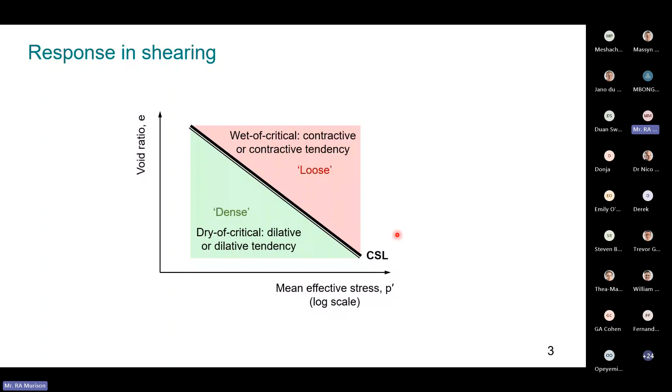Now, how does the state of the soil influence response in shear? I'll start off by looking at an example of a sandy soil, sheared drained in triaxial compression.

This is probably the reason that if you look at your typical drained limit equilibrium analysis, void ratio doesn't really feature if you're designing on critical state friction angles, and you're happy to assume one friction angle for the soil, because the friction that can be mobilized during drained shear is the same for both cases at critical state.

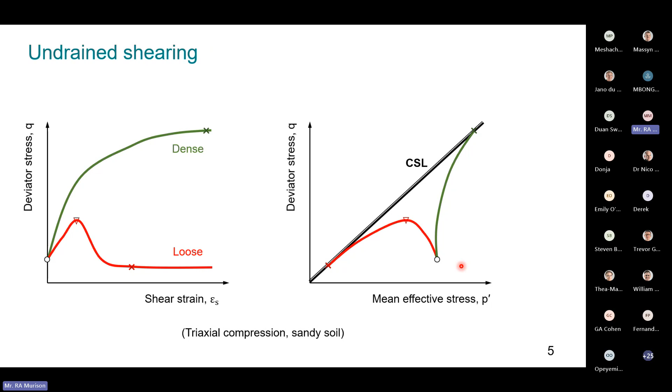Where the real difference comes in is during undrained shearing. Again, we've got two samples starting off at the same stress state. The dense sample might show a tendency for volume decrease, so generation of positive excess pore pressures initially, after which it will exhibit dilative tendency to critical state. We mobilize a much higher undrained shear strength for the dense case than for the loose case, where contractive tendency is exhibited from the beginning of shearing. We mobilize some peak undrained shear strength, and then there's strong strain softening to critical state. Sometimes this critical state undrained shear strength can even be lower than the in situ value based on anisotropic consolidation that might occur in situ.

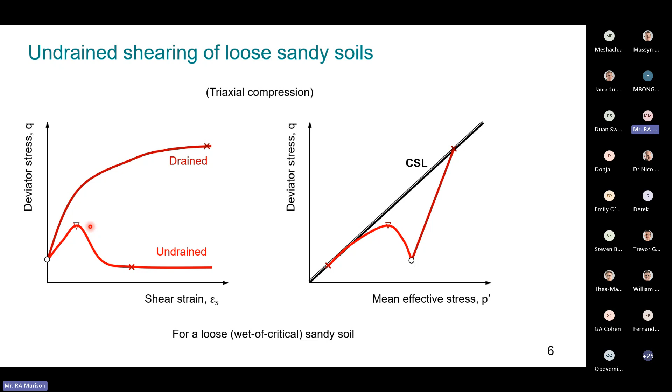So just a summary on that, and why we're particularly concerned about undrained shearing in this day and age: if we have the same sample, loose, starting at the same stress state, one sheared drained and one sheared undrained, we can mobilize a much higher shear strength in the drained case than the undrained case at both peak and critical state conditions. So where does compression behavior come into all of this?

Critical state soil mechanics is a concept that marries the compression or consolidation and shear behavior of a soil. We've seen now how the state and stress history of a soil element can significantly influence its response during shearing. How does the element get to that current state?

If you look at a tailings-related example where you deposit an element of soil onto a facility, it's a geologically new material with no stress history, so we know its current state. If we do not at the very least have an opinion on the compression model to which the soil conforms, how would we know what its future state might be, and as a result, its future response in shearing?

I think it's quite curious that we can calibrate entire critical state soil mechanics based constitutive numerical models using only the shear behavior, without ever considering compression behavior, when critical state soil mechanics at its core is a framework that combines compression and shear behavior. So that's just an opinion, I suppose.

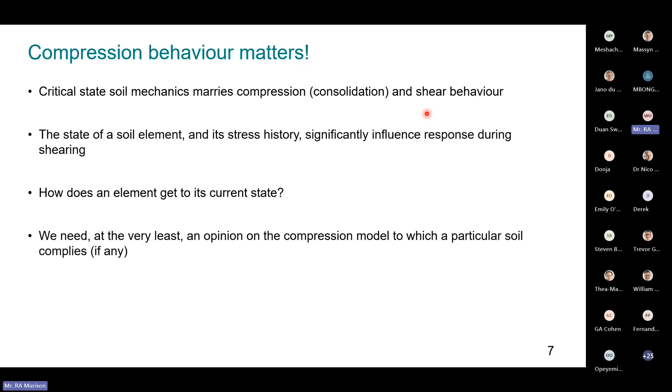But if we move on to our idealized frameworks for compression behavior within the realm of critical state soil mechanics, I'd like to start off by explicitly defining what I mean by normally consolidated throughout this presentation. An element of soil, if it is currently at its highest effective stress throughout its stress history, is considered normally consolidated. That means a soil element is over-consolidated if and only if it has experienced greater effective stress in its history than its current effective stress. This is the strict definition which I'll stick to throughout the presentation.

Now we'll start off with an idealized framework for clays. Terzaghi, in his original theory of one-dimensional consolidation, assumed that for any given soil, a unique relationship exists between its void ratio and effective stress if it's normally consolidated. So what that implies is a unique normal consolidation line. But Terzaghi never actually experimentally proved this explicitly.

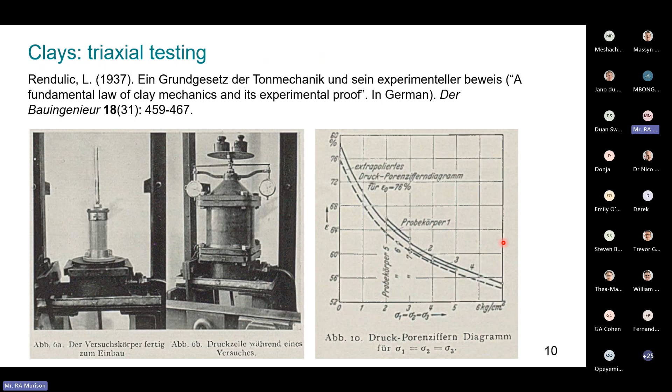This is a screenshot from this 1937 paper looking at some of the triaxial consolidation results. If we trace over these and plot them on a log scale, like we typically do these days, these are the results. We're looking at 4 different samples prepared to different initial void ratios, then consolidated to various effective stresses with the volume change tracked.

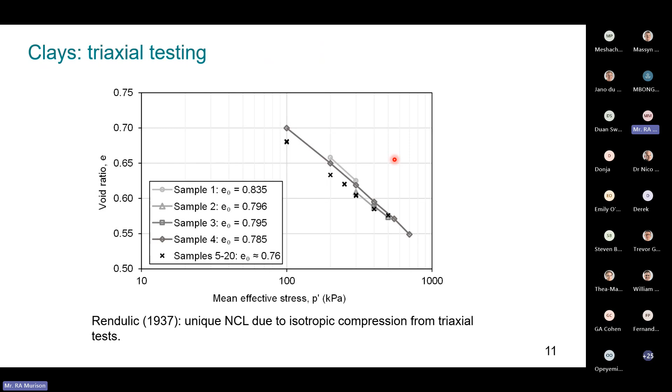These seem to plot within a very narrow band. Additionally, he prepared 16 more samples, which he consolidated to their effective stress at the beginning of shearing in one step, and those are the X's we have here. There's actually 16 X's plotted here, but they're really plotting on top of each other. What we see is that all of these results converged into a narrow band, and this was enough evidence for Rendulic to propose that a unique normal consolidation line exists for a given remolded clay.

So if we put this all together, we get our idealized compression model for clays within the realm of critical state soil mechanics. What we have is a unique normal consolidation line, which acts as a state boundary surface. This separates impossible states from possible states for remolded states of structure, which will become important later. Plastic strains can only be generated upon this normal consolidation line. Then we've got an infinite number of parallel swelling lines upon which strains are elastic, and the initial void ratio of a sample does not influence the position of this normal consolidation line.

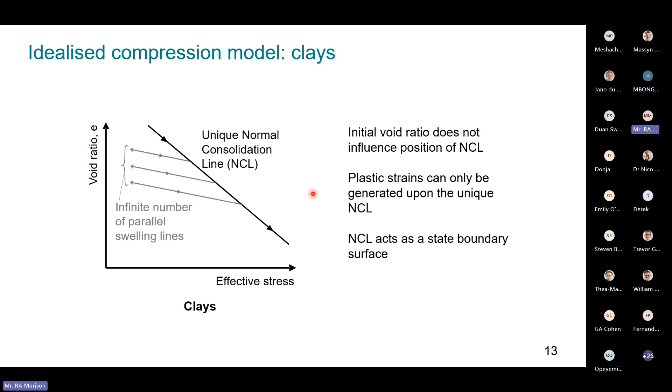And this is applicable to high stresses. If we look at any of the experimental results from other authors that they presented to verify their constitutive model, convergence onto the LCC only occurs at very high stresses, often over 10 megapascals. One limitation, though, is that they assumed the compression behavior at low stresses is elastic, and that seems counterintuitive. If you have a loose packing of sand, you load it and allow the particles to rearrange themselves, then remove the load, it's unlikely it would rebound back to the same initial volume.

So along come Jefferies and Been in 2000, presenting what is probably the most complete experimental program proving the compression behavior of sands that we have access to. They tested an Erksak sand, which is a clean sand with a D50 of 330 microns and a fines content of 0.7%. Importantly, all the tests they considered were normally consolidated from the outset.

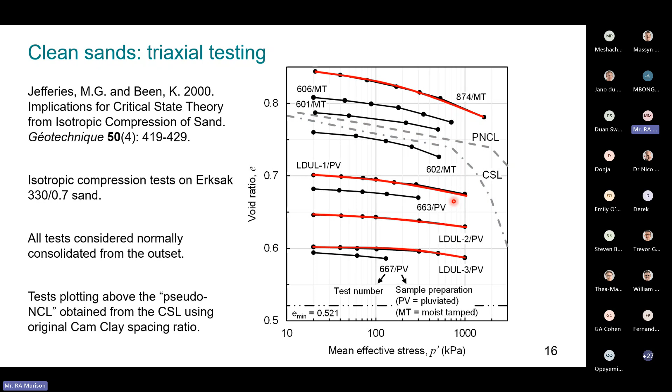Then I'd like to zoom into these 4 tests that I've highlighted in red. Each of these tests was loaded and unloaded, sometimes a number of times. What we see for each of them is this classical form of a normal consolidation line and a swelling line, which is flatter than the normal consolidation line, meaning that since we don't recover all of the strains imposed during consolidation, plastic strains must have occurred.

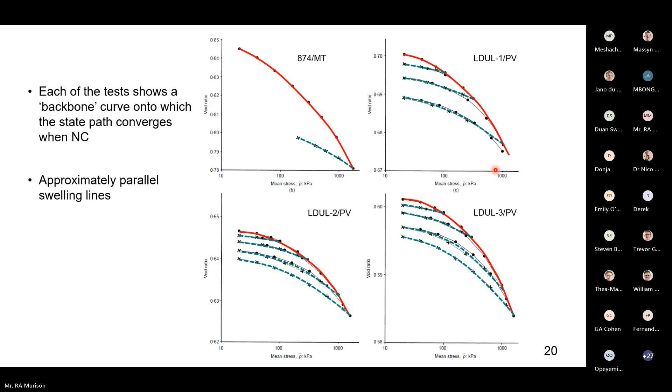So we see elastoplastic behavior here rather than strictly elastic behavior. If we call this a normal consolidation line and then the green line a swelling line, we see the same form for all of the tests where we've got this backbone normal consolidation line and a number of parallel swelling lines.

If we put all of this together, we get our idealized compression model for sands, which has an infinite number of parallel normal consolidation lines, upon any of these, there can be plastic strains that are generated. None of them act as a state boundary surface until they converge onto the limiting compression curve, which here is considered to be the state boundary surface.

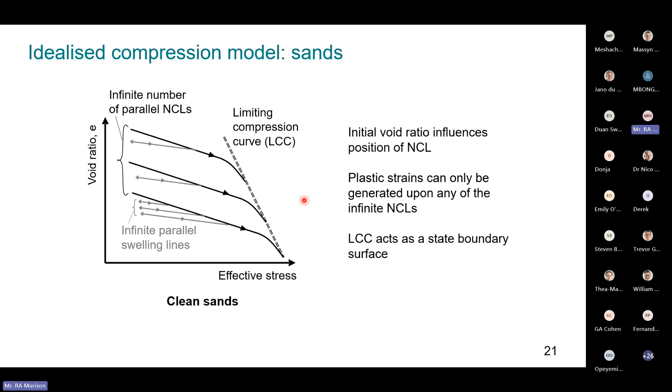The initial void ratio does influence the position of the normal consolidation line. And then again, we have an infinite number of parallel swelling lines, as we did with clay. So yes, just a summary with the 2 idealized models next to each other.

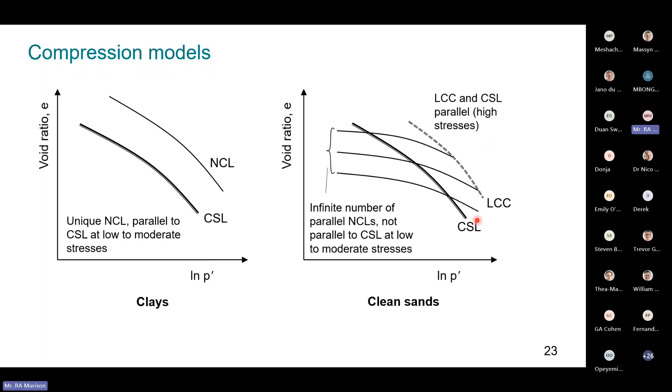The reason that's important is for clay, if it is normally consolidated, it is always in a wet-of-critical or contractive state, regardless of the stress state. Whereas for clean sand, we could happily be normally consolidated and still dry of critical or dilative if we're traversing along this line, for example.

But if we were to load this far enough and eventually cross over the critical state line, we move into a wet-of-critical or contractive regime.

So that's enough on all the theory for now. Let's look at some real experimental data from our laboratory at the University of Pretoria.

I'll start off with expansive clays, which, as I stated, is my particular field of interest. This is the section of the presentation that's actually relevant to the scope of my PhD. We've got 2 sites in South Africa from which we've obtained highly expansive clay samples.

One is close to Vredefort, which is called the olive clay, and one close to Steelpoort, which we've called the black clay. I've plotted the location of these 2 sites on top of the distribution of expansive clays in South Africa, plotted by Williams et al. in their state-of-the-art paper in 1985.

We can see that the olive clay is in a region where severe movement of foundations due to heaving of expansive clays is commonly reported. And the black clay is in a region where some severe movement has been recorded in the past.

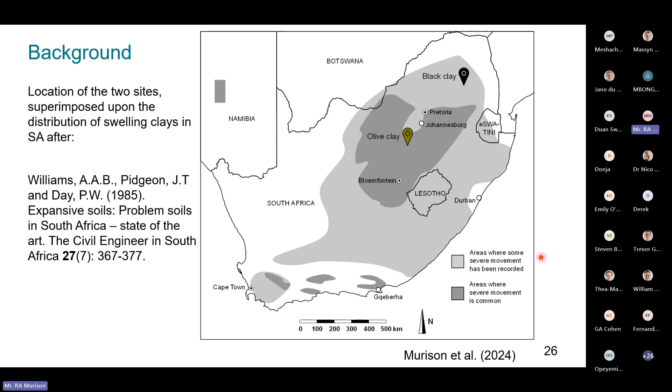For background on these 2 clays here, we've just got photographs of compacted samples of each. The black clay is marginally finer than the olive clay, but both have high clay content in excess of 50%. The olive clay is more plastic than the black clay, but again we have high PIs for both, 82 and 55, so really plastic stuff, really expansive stuff.

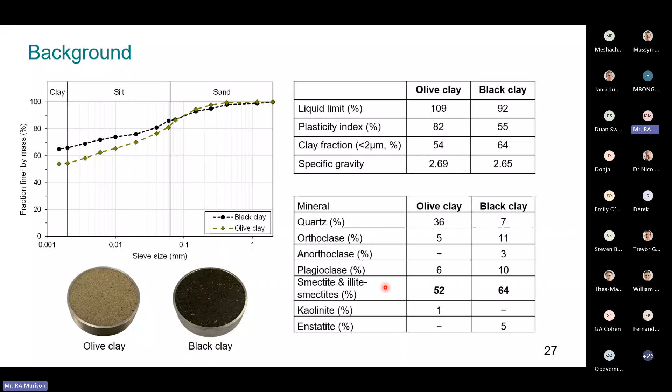Finally, I'd like to highlight from our X-ray diffraction results, the predominant mineral constituent of both clays is smectite, which is the mineral group to which montmorillonite belongs, and that's the clay mineral that often drives expansive behavior of soils.

So let's look at some oedometer test results. What we're looking at here are swell under load tests, followed by consolidation.

A number of samples are built at a void ratio corresponding with the in situ void ratio. Each sample is loaded to a particular stress, and then the cell is flooded, allowing swell to occur. That in situ void ratio is approximately 0.85 for the olive clay and approximately 1 for the black clay.

If we look at the 1 kPa test, for example, we started at a void ratio of 0.85 and allowed the sample to swell, and it swelled 43%. So it really is very expansive stuff.

After bringing the sample to a state of zero suction, it's conventionally consolidated. If we look at the compression parts of each of these tests, at high stresses, they converge into a narrow band, which indicates a unique normal consolidation line. It's important to note that this only occurred at high stresses for this state of structure.

So if we were to stop the tests at 400 kPa, for example, we really wouldn't know much about this clay, but the magic happens at high stresses. And then we have what seem to be parallel swelling lines as well for practical purposes.

The case for the black clay wasn't as simple. If we look at the 1 kPa, 12.5 kPa, and 50 kPa tests, these all converged into one band of normal consolidation lines, whereas the 100, 300, and 800 kPa tests converged onto a different normal consolidation line that plotted above the previous one.

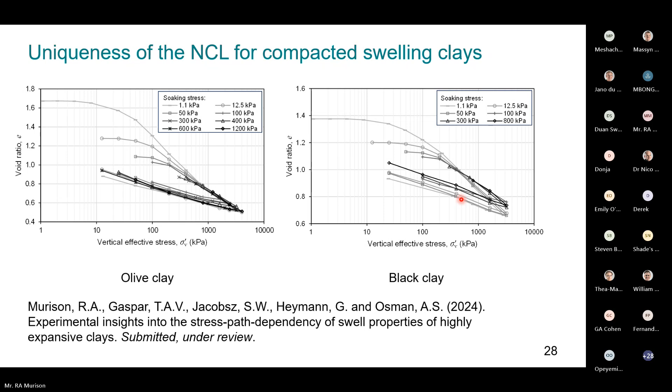We can look at this in more detail by plotting the compression and expansion indices—the slopes of the normal consolidation line and the swelling lines—against the volumetric strain imposed upon the sample during soaking. We see that even though strains in excess of 40% were experienced by the olive clay samples, this didn't bear much influence on the compression index at all.

Whereas for the black clay, any samples that were swelled more than 5% experienced a softer response, and there's this distinct jump. So structure is clearly important, and I'd like to highlight a couple of things about how structure influences the compression and response of soil as well.

But first, I'm going to look at why we think that these two clays might have behaved differently. The reason that we've come up with is the microstructural arrangement of the two clays.

Gens and Alonso proposed these two microstructural arrangements that are typical for expansive clays in their extended Barcelona basic model for expansive soils. What we have here are elementary particle arrangements, which are literally just stacks of a few clay platelets, and these are arranged into a continuous matrix for microfabric type A.

Microfabric type B is actually a structure that was also proposed by Ian Brackley of the CSIR in South Africa in the 1970s, and Gens and Alonso noted his influence in developing this microstructural arrangement. Here, elementary particles organize themselves into aggregations or packets.

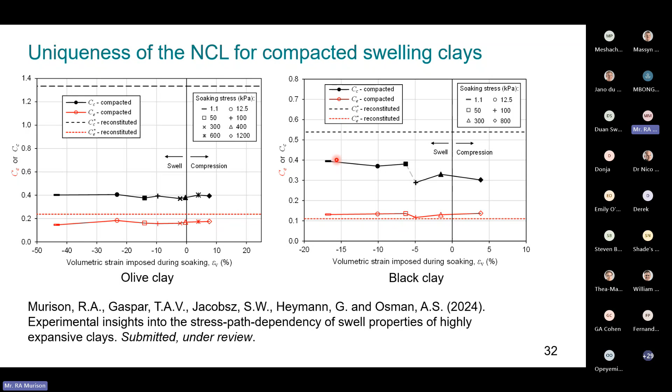So next up, I'd like to move on to results for silica sand. This next section is actually the scope of the original YPE paper, which was titled The Influence of Sample Aspect Ratio on the One-Dimensional Compression Behavior of a Silica Sand.

So we start off by looking at the boundary conditions for a fixed ring oedometer sample. We know that compression and drainage only occur in one dimension, which is vertical, and we've got full lateral restraint, so we can call this K0 consolidation.

We'd be under-measuring the compression because not all of the effective stress is being transferred to the bottom of the sample. So given these assumptions and free body diagrams, we can actually determine an expression for the difference between this top and bottom stress.

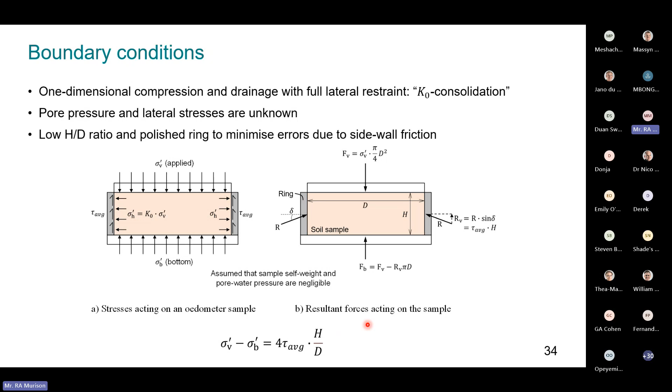For this reason, the ASTM standard specifies that H/D ratios of less than 40% must be used, so the diameter of the sample has to be at least 2.5 times greater than the height of the sample.

And the question I wanted to ask in this paper was, is that a sufficient assumption for dense granular materials where large sidewall frictions could be mobilized?

If we look here at our 50 millimeter diameter, 20 millimeter high oedometer ring, the photo doesn't really do it justice, but it feels quite ridiculous to test something like this when you've applied a large force in order to get the sand into the sample. Looking at it, it just feels as if the boundary conditions have to limit the compressibility that you can measure. But it complies with the standard, so I wanted to test whether that is a fair assumption.

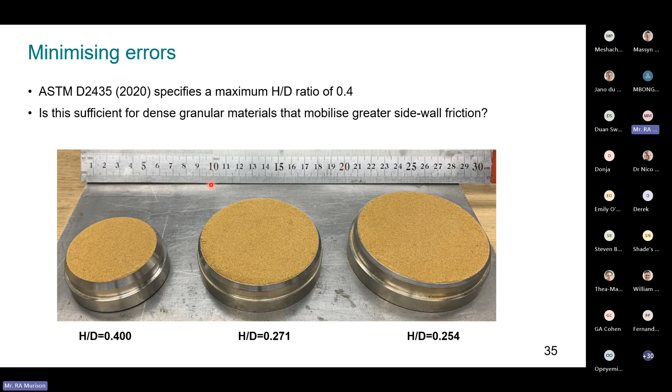So the material that was tested is a fine uniform silica sand that we usually use for centrifuge modeling at the University of Pretoria. It's got a D50 of just under 100 microns and a fines content of just over 20%, with a critical state friction angle of 33 degrees. So it's not quite a clean sand like the one that Jeffries and Been looked at, but it's still a uniformly graded sand.

The testing program was to use three different oedometer rings that we have access to in the laboratory, and thus three different aspect ratios to test two different density conditions. So 3 loose samples were prepared and 3 medium dense samples were prepared.

These were carefully moist tamped at a water content of 8% to a carefully controlled void ratio. The reason I had to be so specific is that we know the initial void ratio influences the compression behavior of a sand. So if you're trying to compare apples with apples across 3 different samples, you need to get as identical as practically possible an initial condition.

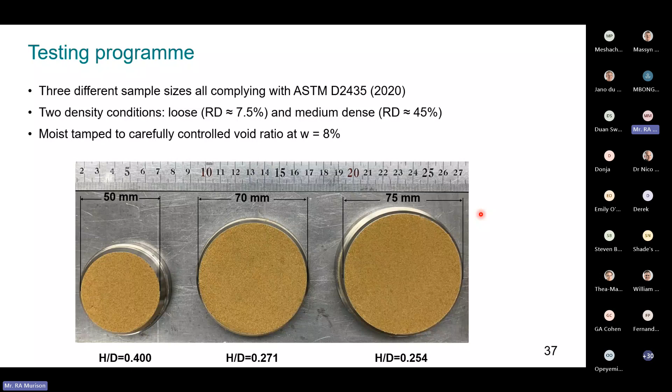All of the testing was conducted in our new GDS automatic oedometer. A seating stress of 5 kPa was applied to the sample unsaturated, and then the cell was flooded to saturate the sample. After saturation, the sample was incrementally loaded to 1.5 MPa and then incrementally unloaded back to 5 kPa.

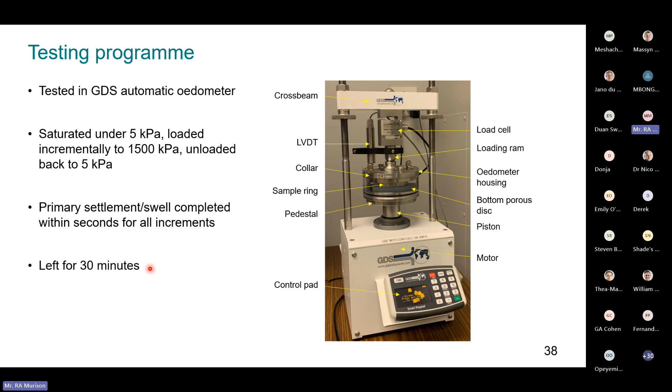Primary settlement and swell for all phases in this testing program only took a few seconds because we have a highly permeable sand, but the increments were still left for 30 minutes to ensure that all excess pore pressures had dissipated. So let's look at some of the results.

The loose samples were considered to be initially normally consolidated for two reasons. Very little compactive effort was required to form the samples, so there was no significant stress history applied to them. And each of them also collapsed by 2 to 3% upon saturation, meaning that they were initially in a metastable state that was only attainable due to suctions in the sample. So we see that collapse here.

The medium dense samples were initially over-consolidated because they required some compactive effort. They could be compacted by hand, but some stress history would have been imposed. Casagrande constructions were done on each of these to determine the pre-consolidation pressure, or yield stress, and beyond 120 kPa, we could consider these to be normally consolidated as well.

Looking at the three loose samples with our different H/D ratios, they start off at a similar void ratio, and for all practical purposes, we're looking at the same compression curve and same unloading curve here. So there was an insignificant influence of sample aspect ratio on the compressibility behavior of our loose soil.

Looking at our medium dense sand, once we've moved into the normally consolidated regime, we're looking at three very different compression curves. As we increased our aspect ratio, or decreased our diameter relative to the height, the compressibility decreased, which means we're under-measuring compression because of our boundary effects.

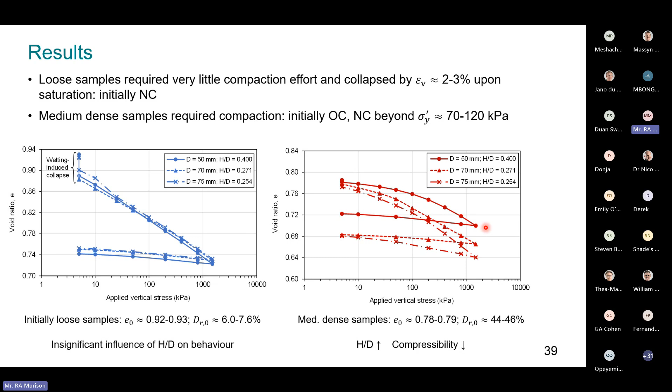If we plot all of these on the same set of axes, we see that the 75 millimeter medium dense sample seems to have a normal consolidation line that's approximately parallel to that of the three loose samples. We can see that here as well if we compare the compression index to the compression indices of the three loose samples. So that then seems to conform with the framework that we developed earlier.

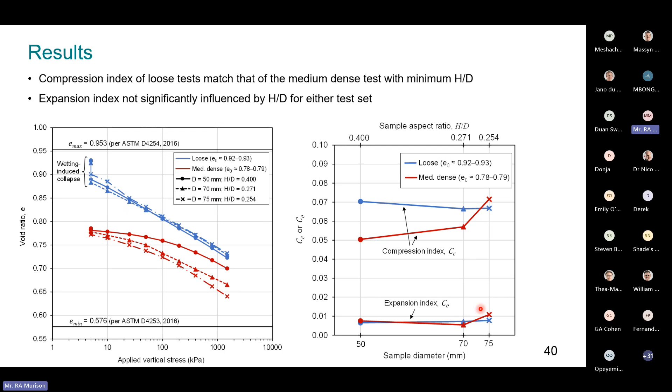For both sets of tests, the expansion index was not significantly influenced by sample aspect ratio. So why are we seeing what we're seeing?

If we start off with the medium dense samples in a dry of critical state, any shear stress mobilized along the soil ring interface would result in dilation. That's a mechanism which is driving volume increase and counteracting our compressive mechanism through the increase of effective stress. So because of these counteracting mechanisms, we should witness reduced compressibility.

The reason this is a bigger issue for smaller samples is if we've got the same shear stress being mobilized at the interface and the same zone of influence of this dilation, the smaller our plan area gets, the bigger the proportion our dilation zone takes up of the sample, and thus we have bigger error.

Another way to look at this is the horizontal stresses in the medium dense samples are greater than that of the loose samples, resulting in a higher mobilized shear stress. So per the equation that we developed earlier, it's likely that the error would be bigger for denser soils in the first place. So what do we recommend looking at all of this?

If you're specifying a testing program for odometer tests on a granular material, you want to use as low an H/D ratio as possible. So use the biggest diameter that the lab has available.

So in summary, we've got our sand results here where we've only considered the medium dense test where H/D was sufficiently minimized, and then we look at our three loose tests. Here we have parallel normal consolidation lines, so it behaves like the idealized framework for clean sands. And as discussed, we've got results on a clay which conform to the idealized framework for clays.

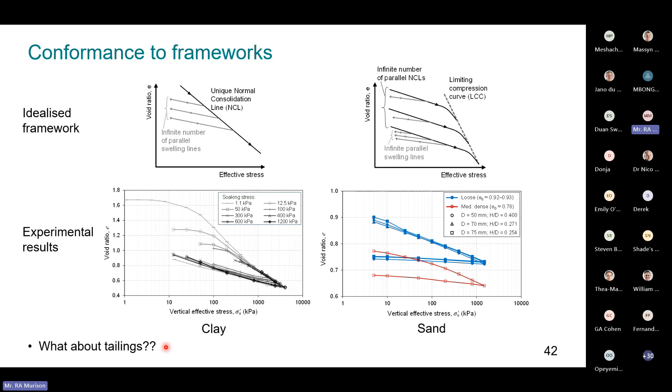And why might the behavior of tailings be different? Well, we can look at the different factors that can influence the compression behavior of a soil, starting off with particle shape and grading. This influences how the particles are able to rearrange themselves when compressed, and also what the possible packing arrangements and thus possible void ratios are.

The second thing is the mineralogy of the soil - are there any clay minerals present? As a rule of thumb, clays behave like clays not just because of the presence of clay-size particles, but because of the presence of clay minerals and how these minerals interact with water.

The next thing to look at, perhaps more applicable to granular soils, is the strength of the grain minerals that make up the sand. Your tensile strength would influence at what stress a particle could split, and the compressive strength would influence what stress it would be able to crush. So a quartz sand, for example, would traverse onto the limiting compression curve due to particle crushing at a much higher stress than something like a carbonate sand, which has softer grain minerals.

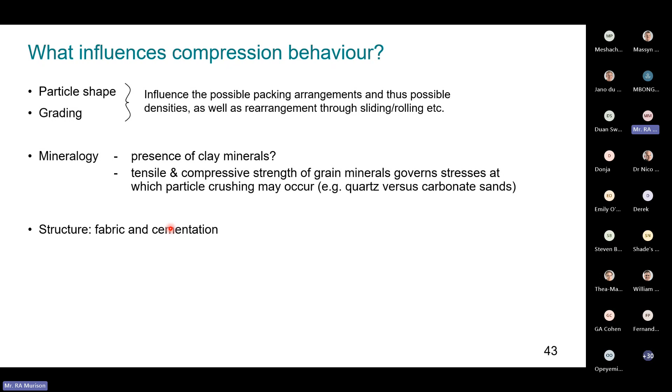And the final thing is structure, which is the combination of fabric and cementation. We've looked at this in a little bit of detail already. For the sand tests we've just looked at, as well as the tailings tests we're about to look at, the fabric was kept consistent through moist tamping, and all of the samples were remolded to remove any influence of cementation. So structure shouldn't really be a factor in the case we're looking at.

So let's look at this case study of the gold tailings available in our lab. A little bit of background: the mine is on the East Rand of Johannesburg. The ore is mined from the Witwatersrand Supergroup. It's an upstream constructed facility utilizing spigot deposition, and our samples were all taken from the outer wall, so from the structural zone of this upstream facility. It's the coarser fraction of tailings within the facility, which doesn't necessarily mean we're looking at, by definition, a coarse tailings, but it is the coarser fraction on the dam.

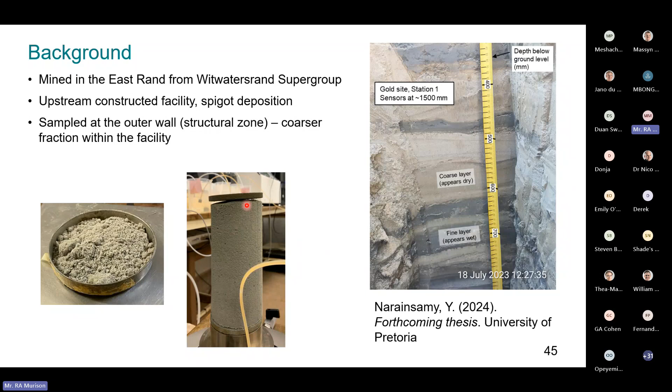So what we're going to look at is results from a case study we published in the Geotechnical Testing Journal, trying to investigate whether the normal consolidation line for this gold tailings was unique. The average grading classifies as a non-plastic sandy silt, with a D50 of 63 microns, so it is quite fine. It's got a fines content of 50%, and the critical state friction angle is 35 degrees, which is quite high and like a typical sandy material.

I'll note as well from the 30-odd tests Yashay conducted throughout his PhD, the shear behavior of the soil is not something you wouldn't expect for sand-like material. We seem to see behavior similar to that I presented at the beginning for the shear behavior. But let's look specifically at the consolidation behavior first.

So at first glance, it doesn't look like we have any clay mineralogy here. That was confirmed by the XRD results, where this is 96% quartz—for all intents and purposes, nearly identical in mineralogy to the silica sand which we just tested.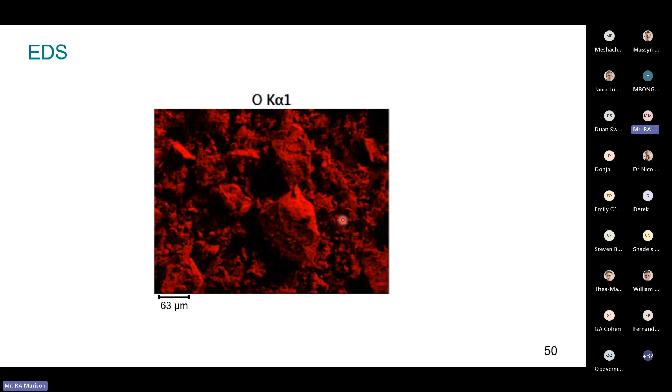We took some EDS photographs of the sample to see the elemental composition. This is energy dispersive spectroscopy, and how it works is we can map out qualitatively the elements present within the sample based on the X-rays emitted from it. If we look here, our coarse and fine particles both contain silicon and oxygen in the same space, so SiO2 or quartz. It's not as if only our coarser particles are silica—silica seems to be everywhere, which makes sense since it's 96% silica overall.

We've got some aluminium as well, because aluminium oxide is a compound part of both the pyrophyllite and the muscovite identified in the XRD results. And we've got some iron in the sample too, which is part of the pyrite. So in terms of mineralogy and particle shape, this is very close to the silica sand we just looked at.

The one big difference is in the grading. First, it is finer, but if you were to see a uniformly graded silt, for example, you wouldn't expect it to behave differently if the particle shape and mineralogy are the same—it wouldn't behave differently to the silica sand then. The big difference is in the shape of the grading curve: it's more well graded, meaning the particle arrangements attainable might be different, and the compressibility might thus be different.

But is this enough to drive some compression behavior that's not sand-like and have it change to something else? Well, we'll see. All of our samples again were moist tamped at a water content of 15%.

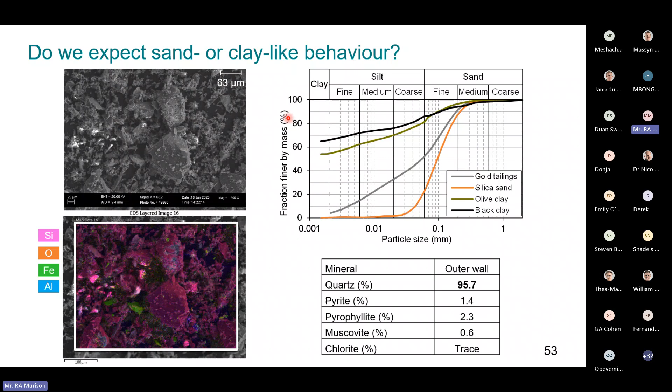Oedometer rings of at least 75 millimeters in diameter were used. Based on the fact that this critical state friction angle is quite similar to the silica sand, this should be sufficient to minimize errors due to mobilization of sidewall friction. Samples were moist tamped to initial void ratios ranging between 1.2 and 0.6. Again, a seating stress of 5 kPa was applied, the cell was flooded, and any potential collapse was observed.

Then all of the samples were incrementally loaded to high stresses up to 3.2 MPa. Primary compression or swell generally occurred within the first few minutes of compression and unloading, but each increment was still left for 2 hours to ensure that all excess pore pressures are dissipated.

Then some additional tests were done, initially compacted to a void ratio of 1 and only loaded to smaller stresses. After all of these tests, we sent each for a grading analysis to determine whether any particle crushing had occurred, and if so, at what stress it starts to occur.

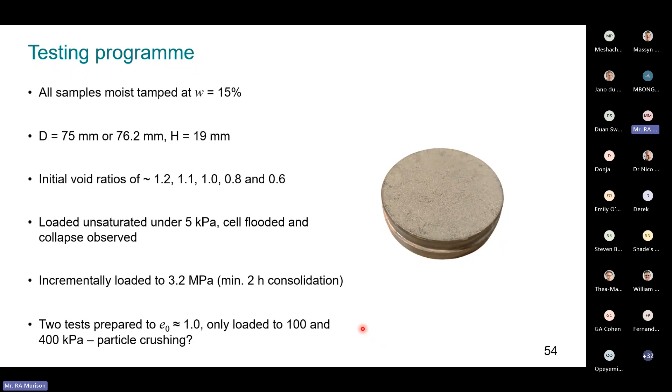So let's look at some of the results. The void ratio between 1 and 1.2 was considered initially normally consolidated, because these samples had little to no compactive effort required to form them, and they exhibited initial collapse, as we see here, meaning they were in an initially metastable state.

Samples at a void ratio of approximately 0.8 were overconsolidated—they required some moderate compactive effort that could be done by hand, but needed a tamper and hammer. Finally, our sample at void ratio of about 0.6 was definitely heavily overconsolidated; we needed a hydraulic press to form it, compressing it with 2.6 tons of force, or 5.7 MPa—definitely overconsolidated with a big stress history initially.

And with all these results, they seem to converge into a narrow, normally consolidated line band. All of the swelling lines also seem to be parallel, so our unloading lines and initial loading lines for the overconsolidated samples are also parallel for practical purposes. If we look at this in more detail, we've got our expansion index during unloading and initial loading of our overconsolidated samples. These numbers are quite similar. And the compression index of our samples, other than the 0.6 sample, were all very similar as well.

Now, this doesn't prove that anything is unique. All it says is that the normal consolidation lines are in fact parallel. We need another tool to prove that they are occupying the same space, which would imply a unique normal consolidation line.

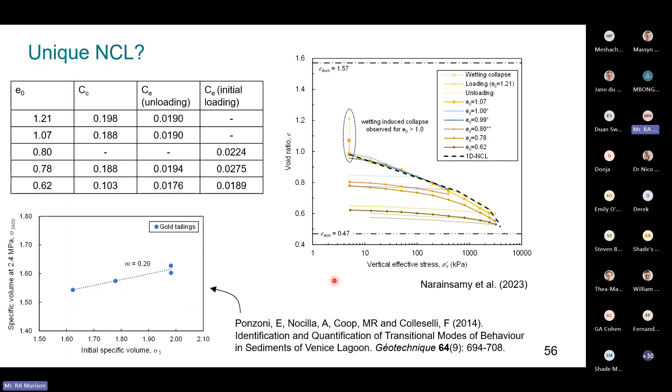What you might say is, how do you know that you've not traversed onto the limiting compression curve, and that's why you're occupying the same space for each of these compression paths? Well, as I said, we did gradings before and after each test.

So the markers we have here are the average initial grading, and then we've plotted the maximum stress any sample had experienced versus grading curve. What we see here might be some evidence of a marginal increase in fines content if we look at the 2.4 MPa sample, then the 3.2 and the 1.6. But then we look at the 100 and 400 kPa samples, and somehow the fines content has reduced, and that's certainly not possible if you have a unique initial grading.

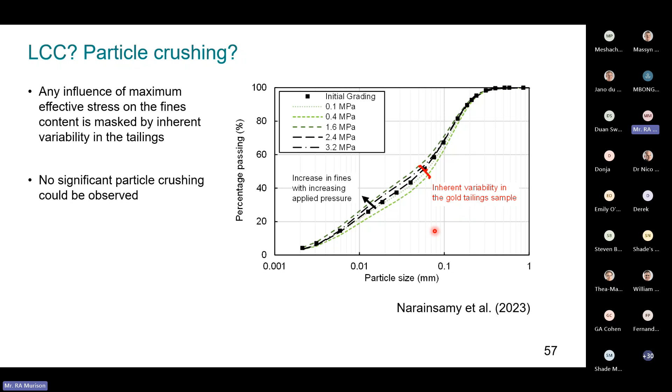Luckily, Yashay has done a whole bunch of tests where 32 different grading samples were taken throughout the course of his PhD, and the grading curve plotted within this envelope. So there is some inherent variability in the gold tailings. And only one of the samples we took plotted outside of the envelope created by the other 32, meaning that any particle crushing, however marginal, could have been masked by the inherent variability of the gradings of the tailings.

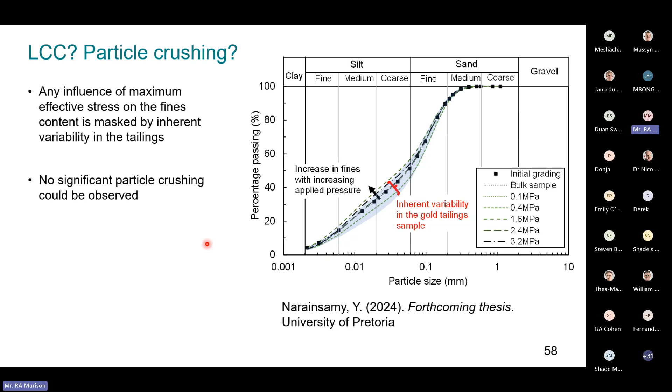So we cannot provide any significant evidence of particle crushing, and under stresses of 3.2 MPa, given what we saw earlier for quartz sands, it is unlikely that we had converged onto a limiting compression curve. So if we put all of this together, the compression behavior of this tailing seems to comply best with the framework for clays.

Completely run out of time to discuss the triaxial testing in any detail, but as part of the study, some triaxial consolidation tests were done to establish the isotropic normal consolidation line, which, if we assumed a constant K0 value for our oedometer tests, was approximately parallel to the isotropic line, which complies well with theory. And then drained and undrained shearing tests in triaxial compression were used to establish this critical state line. There's, in addition to these, 30-odd triaxial tests in Yashay's PhD. So definitely keep an eye out for that.

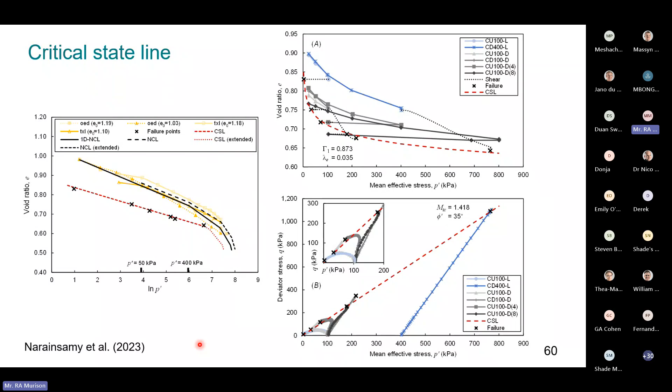Some very interesting stuff. But if we were to summarize all of this, our normal consolidation line and critical state line that we determined were approximately parallel as well.

So the slopes of these two lines are not identical, but over any practical stress range between 50 and 400 kPa, the slopes are similar enough and the lines get nowhere close to crossing each other. So for all practical purposes, this is behaving more like a clay than like a sand in terms of its compression behavior.

So what would all this imply for a tailings material? As we said earlier, if the compression model to which your tailings conforms is clay-like, regardless of the stress level, if you are normally consolidated, you will always be wet of critical or contractive. I'd like to emphasize this is a very specific case to our facility, our material, our element tests. It's definitely not universally true for tailings, and this would depend on the tailings material you're considering.

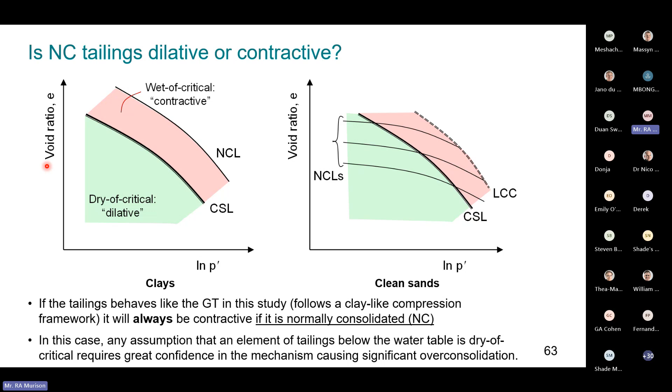But if this were to be the case, what it means is if an element of tailings in your structural zone is below the water table, for you to assume that it's dry of critical, you need to have great confidence in any mechanism that you believe is causing significant overconsolidation of the material. Of course, we have the theory that densification during desiccation causes overconsolidation of tailings, and this is one mechanism you could look at. But you need to have great confidence in that mechanism if you want to believe that tailings below the water table that's become saturated again is still overconsolidated, or dry of critical, if this is the compression framework to which your tailings complies.

That brings me essentially to the end of my presentation. Some things I'd really like to note: it is our opinion that an understanding of the compression behavior of soils is as important as an understanding of the shear behavior, for considering both the volume change behavior as well as a potential response during shearing. There are some consequences that follow given the assumption of the compression framework to which your soil might comply when looking at shearing from a normally consolidated state.

Looking at some more specific conclusions for the different soils: it is advised to minimize the H/D ratio when testing a granular material as far as practically possible, so specify the largest sample diameter you can for your lab testing program. For the expansive clay, soil structure is an important factor to consider because it influences the slope and the intercept of your normal consolidation line. Finally, for the gold tailings we considered, with fines content of 50%, this complied with a compression framework for clays, and what it means is that this tailings would always be wet of critical if it is normally consolidated.

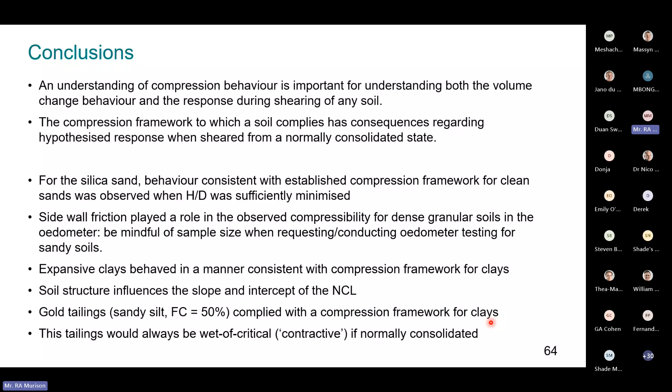I'd like to say thank you to our team from the University of Pretoria that made the YGE special. We've got our three undergrads that came along, Ross, Lizzie, and JP. And then, of course, our postgrads, Yeshe, whose work over the last few years and his guidance have been really important to my development. And then Opeyemi as well, who happened to fly out to Kenya for another conference the day after YGE, but he flew back to join us for our road trip again. As I show here, he never really left us in spirit. So thank you very much again, I really appreciate the opportunity.

And from my side, congratulations to Duan for winning Best Presenter at YGE. I really enjoyed your presentation back then, so I'm excited to see what you have for us today. Thank you.

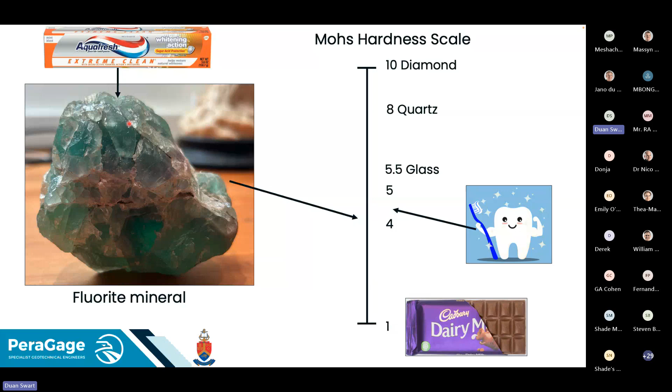But hopefully I can get a wow moment to you guys tonight. Just to give you a brief overview of what I'm going to present: it's two case studies looking at the weathering profiles for the Dullstroom lavas and also dolomite residuum, and I'll be covering the structure and chemistry of these two.

The point of the study, from a zoomed-out position, is that we're trying to understand how a completely weathered, extremely weak rock—less than 1 MPa—behaves, and how that's governed by the soil structure and chemical composition. The question we want to answer is where is that transition from soil behavior to rock mechanics, both from a mechanical and a fluids point of view?

Why are we looking at this in South Africa? From the water research side, 97% of our fresh water sits in the groundwater, and most diagrams showing water cycles ignore the small area called the unsaturated zone, the vadose zone—this is where our geological material usually sits. They tend to focus on the stuff above surface and then also in the phreatic zone. So we're looking at this unsaturated zone.

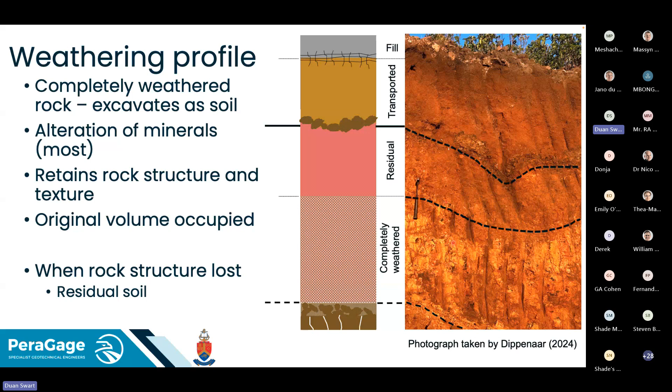Such as kaolinite or iron oxides. A concept to remember throughout this presentation is that for the rock structure to remain, the volume has to stay the same—even though material is being removed, the volume stays the same. If you get to a more weathered point, you'll get a residual soil, and that line is defined by when the rock structure is lost, typically becoming a reddish clay on this kind of rock. That's your residual material.

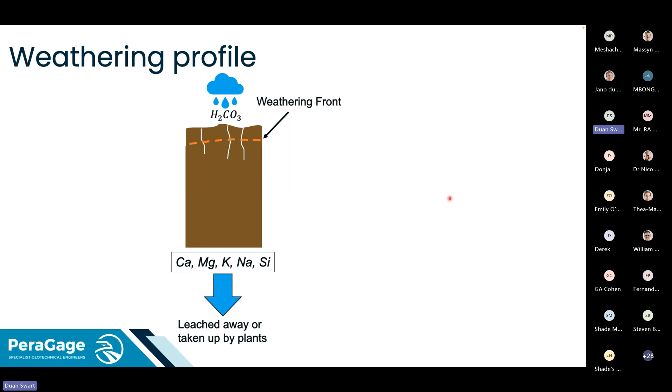To explain it with a diagram: you start with a rock somewhere. There's a weathering front near the surface and near the joints—that's where the most weathering occurs. It rains, slightly acidic rain falls on the rock before it goes to the joints, and as it flows to the joints it removes typical rock ions from crystal structures, which either get leached away or taken up by plants. Over time, the weathering front moves deeper into the surface, and you get an increase in the state of weathering alteration as you move up toward the surface.

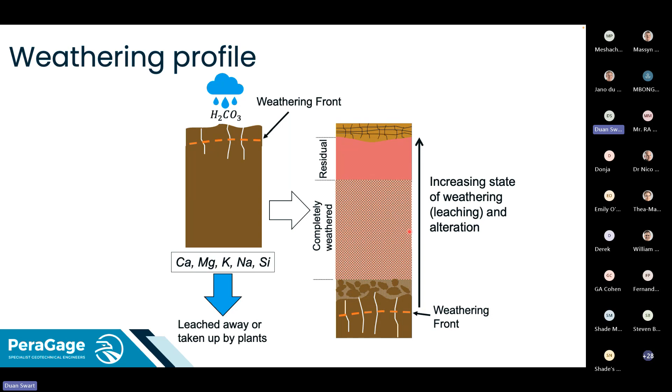Why do we have to look at the porosity or the rock structure? Why is it interesting? It's because it'll govern your porosity, and the completely weathered relic structure is dependent on your parent rock, how it formed, its stress history, and the resultant kind of infill that you get.

Why is porosity important? It's where the magic happens. Anything in geotechnics or geology, the water with unsaturated soil mechanics, it all happens in the pores. It doesn't happen in the grain. That's why doing the grading analysis always isn't the best thing. That's why you need undisturbed samples, which we do, which is fine.

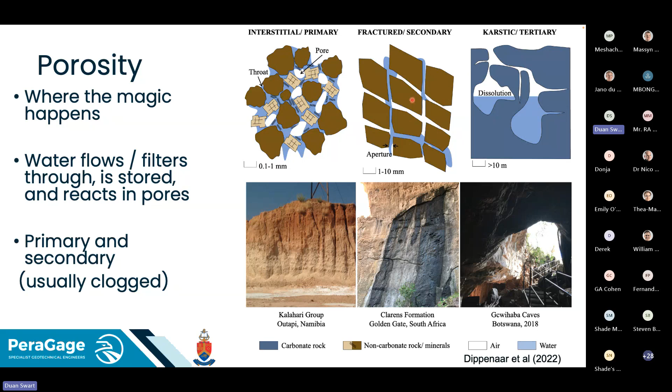Just to give you some context, you get 3 different types of porosities. Primary porosity typically in your soils, secondary in your rocks, and then your tertiary is kind of what you get in your dolomites.

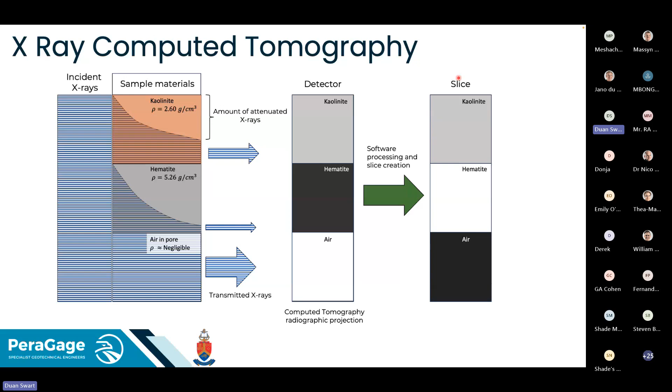So all the images I'll be showing now is of the slice. So your more dense stuff is white, your less dense stuff is black.

I think what I want to highlight here is the benefit of a CT scan is that it can be done at any moisture content, and there's no sample preparation. So as soon as you push the tube in, you can get your sample out. It's fairly easy to do. You close it up at the ends, send it, put it in a box, send it to the lab. They scan it. They can send it back to you for more testing if you want to do densities and stuff like that.

So you get the best picture of the soil structure and the mineral relations, because there's no fiddling around with trying to cut it into a certain shape or trying to dry it out or something like that. And what I found, what we can do with it, you can identify and analyze pores. The size of the pores that you can analyze depends on the sample size. So the bigger the sample, the bigger your pores.

The bigger the sample, the bigger the pores you can pick up, and the smaller the sample, the smaller the pores you can pick up. You can go down to about 2 micrometers with a very small sample, but here we're looking at a bigger sample, so we want to look at the macro structure. We only got to about 0.1 of a millimeter for the pores.

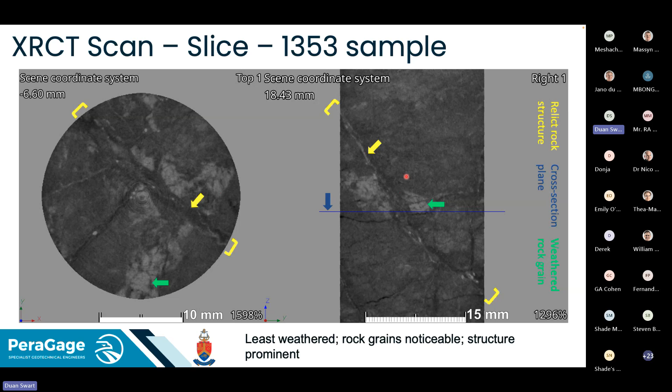This is a slice, just to show you what you can get from it. The little legend of arrows on the right shows this same sample with a top view and a side view. This blue line shows the cross-section plane of the top view, so you can nicely see the structure running through. You can see some mineral grains, lighter meaning more dense. This is most likely microcline, and everything around is probably kaolinite, which are secondary minerals.

Same sample, but now looking at it using a density scan. You can cut off a certain window of density to focus only on the more dense material or the less dense material. For this I focused on the more dense material because I'm trying to see what's running through the structures. Here's the structure running on the left. The very dense material follows the structure, with some above and below it being more scattered, not orientated in a particular way. But all these denser materials you pick up here follow a structure for the sample.

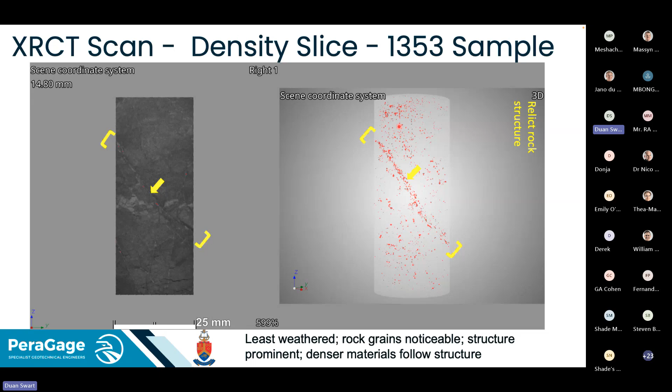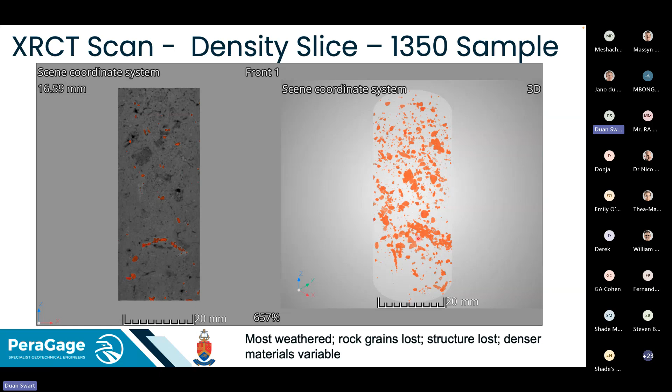Now this is the most weathered sample, the residual soil. You can see that the structure is kind of completely lost. There are a lot more black holes, telling me it's a lot less dense, and the denser material is much more variable in this sample.

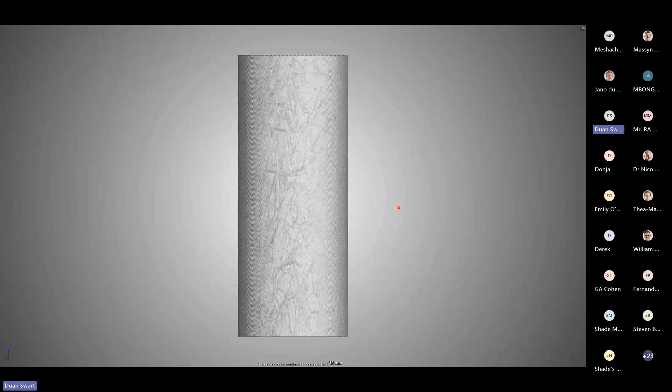The other thing you can do is this 3D porosity analysis video. Once you have all your slices from all the angles, you can put this through a software called Volume Graphics and generate these 3D pore analyses. I'll play that again for you. What you can see from this, which I'll show in the next slide, is that there's some sort of pore orientation going on here.

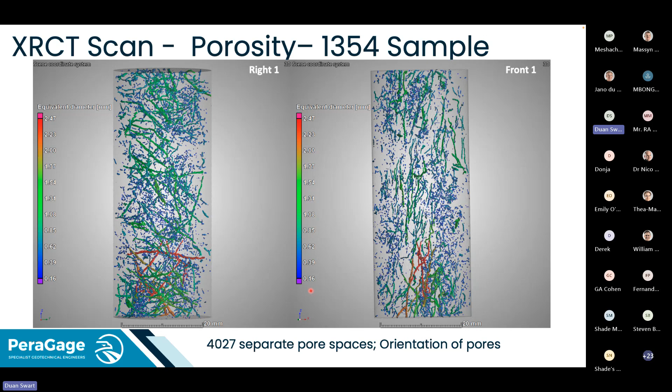So this is the sample you saw in the video, shown from the right and the front. You can see that we didn't get very small pores, only 0.16 on this sample. But what I want to show you is that the pores do have a preferred orientation, which is parallel to the structure we saw in the logs and also on the density scans. In this sample, just for interest's sake, we picked up 4,027 separate pore spaces, and there will be a lot more in a lot smaller pores.

So what that tells us, from looking at the logs, the CT scan, and the stereo microscopes, is that the relic rock structures have infill, and that infill has been coated and the joint stained by iron and manganese oxides, which is much more dense than the surrounding kaolinite. That's what stands out on the CT scans.

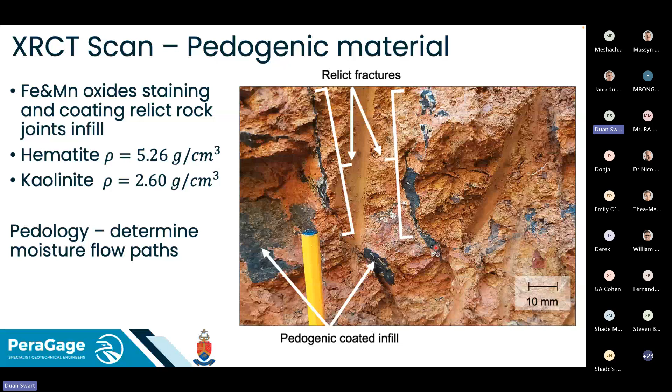What we use this for is to determine where the flow happens, because it's very tough to do a triaxial test and see where the flow is occurring. So using theories from pedology, we're trying to figure out where that boundary happens, whether the flow happens as a homogeneous flow through the primary pores, or if it still follows the secondary structures from the relic rock structure.

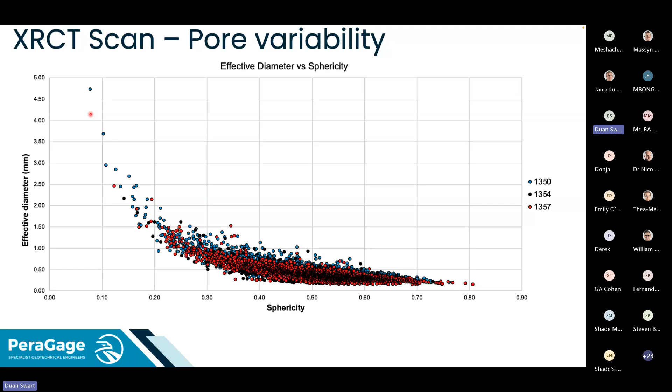So if we take that data, and other tests we did that I can't cover here, and put it back into the weathering profile—you have your sample locations and this increase in the state of weathering.

You will then have these different vertical structural profiles. Generally bulk density starts at a certain point and decreases, carrying on decreasing through the residual, but at some point in the residual it becomes too voided and collapses on itself, compacting, giving an increase in bulk density.

And just for interest's sake, that's typically where your ferricretes form, because as water comes through the topsoil or transported soil, it hits that densified layer and then flows laterally—that's where your ferricretes like to form, with that sitting water.

And the void ratio, or the water storage here shown in green, will just be inversely proportional to the bulk density, and your void ratio generally increases all the way up.

Your primary process and secondary process are based on the relic rock structure. It will be most open in a competent rock, and as weathering occurs, the joints fill up with infill, and the faces get weathered and fall into the joint.

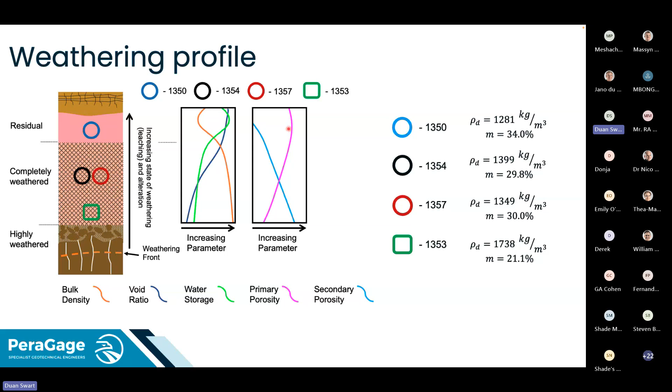So that was looking at the structure of the Dullstroom lavas. I'm now shifting over to dolomite residuum. This is just to give you context of where the sample sites are—I sampled across where I could get samples, looking for wad on the manganese-rich dolomites, the chert-poor dolomites.

So just for definition purposes—what do we call it? There are different types of residual soils from dolomite. We get Ferroan soils, which are your red iron-rich soils; they can be structured or non-structured. You get your manganiferous soils, which is your wad—black to purple and very low density, manganese-rich, which can also be structured or non-structured.

And then you get reworked residuum, where one of these two types of soils reworks to the point where it loses either the structure, or for wad's sake, loses the structure and also the manganese-rich components.

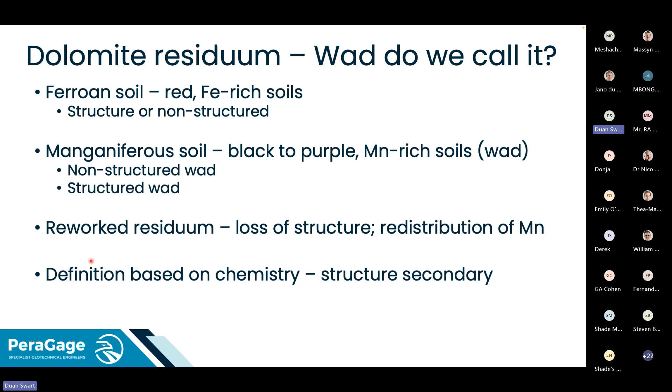Just to highlight that the definition of dolomite residuum is based on chemistry and secondarily on structure. How does it form? It forms the same way as the previous weathering profile I explained. You get your rock at surface, it rains, the water moves down. But what's interesting about this one is that all your main constituents of the rock leach away.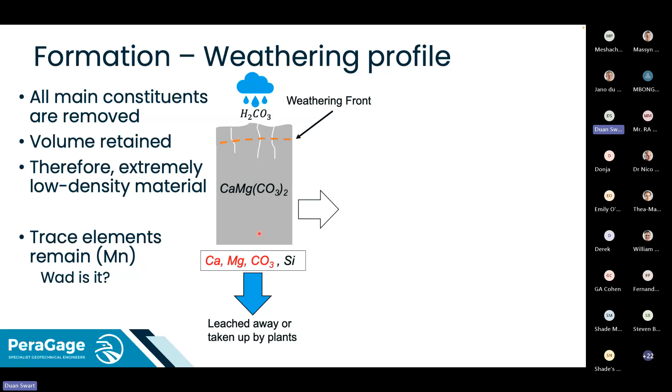That's typical of karst, that's how your caves and things form. But then, if the rock doesn't collapse and the rock volume remains the same, your trace elements will occupy that space. That's kind of how your wad forms. It's the trace elements in the dolomite, usually less than 3% manganese, that occupy that entire space with some iron and some silica, and then you get this very, very low density material.

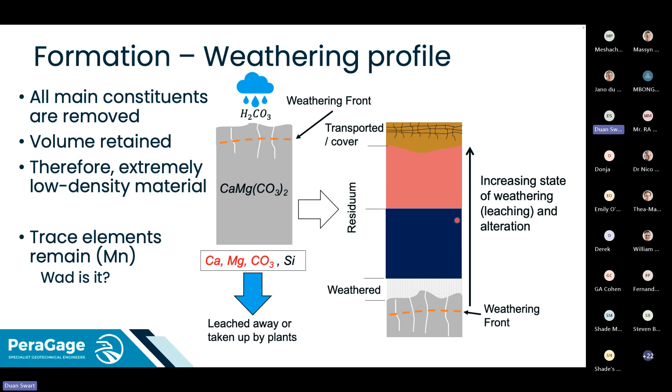But what is it made of? Wad is mainly manganese oxides, but there's different types. The most common one, which you see at the Highveld, or south of Pretoria, is birnessite. It grades as a silt, and it can swap out with iron quite readily.

The second most common one is lithiophorite. It's a clay soil. This occurs more in the eastern escarpment by Graskop and Sabie in those areas. And then you get these two, which aren't as common, but manganite forms in your ferricrete, the Mn nodules and concretions that you get.

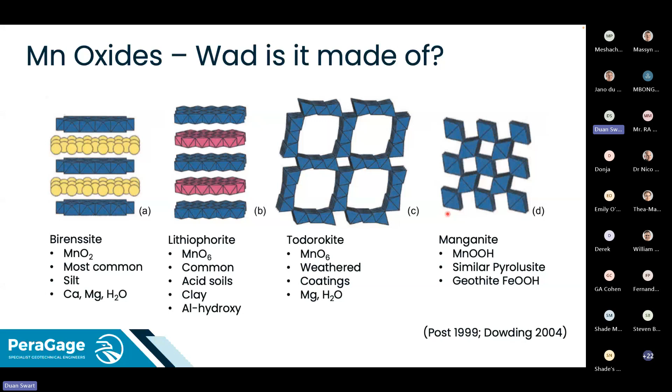One of my questions, when I was trying to find the wad, was why is there wad here and not there? The only study I could find was done by soil scientists who looked at manganese toxicity in pine trees along the eastern escarpment. What they found was that if the soil stays moist, the manganese in the birnessite crystal doesn't mobilize.

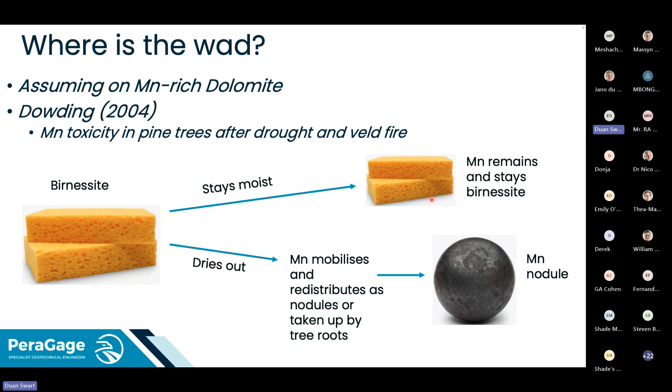So just to show it in the profiles - this is Graskop. If you dig there, you find wad. It's very easy to find wad there. It's generally wet.

The above profile, I can't see it in this photo, but this is abundant nodules and stuff in here from higher up the slope where the manganese has mobilized. And then if you look at it from a stereo microscope, it's generally fine, somewhat a silt with good distribution of color and grain size. And then this is in the Highveld.

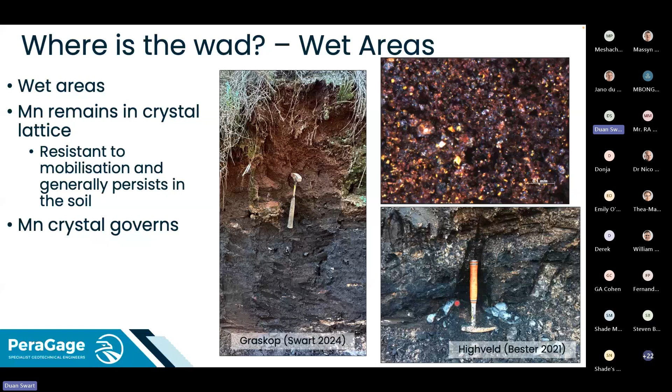So even in Pretoria, where it's a bit drier, this site had a stream passing through it, so the wad could stay wet and remained in profile. And then your birnessite will remain, which gives its high water content ability to the soil. Whereas in dry areas, and this is now most of South Africa, the soil tends to go red because when it dries out, the manganese swaps out with the iron and turns the soil red.

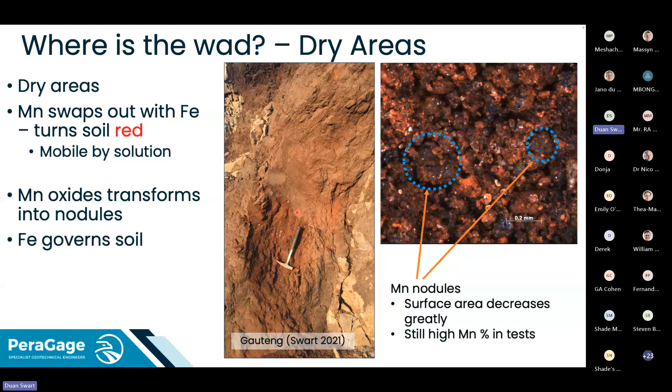And then on the right here, you can see the manganese nodules have formed, and the silica that remains is kind of stained red, as is the finer material. Over time, from a macro scale, the soil will be red, even though it will still have 30% manganese, but it won't have the behavior of birnessite or what those manganese oxides give you.

So the point I'm trying to get across is that the manganese oxides contribute to the water holding capacity, and it gives the wad the ability to have very high liquid limits. So this is just a diagram from Wesley, which I added the wad into, just to show there are other soils that can have very high liquid limits. And reworking essentially reduces the water storage ability, so it's also an indicator of how reworked the material is.

And this also, we haven't tested it yet, but it opens the eyes to how reworking affects the stability of a sinkhole. If the stuff stays moist, it'll have... actually I'll leave that to the soil water retention curve. But yeah, this is what the Mn oxides do.

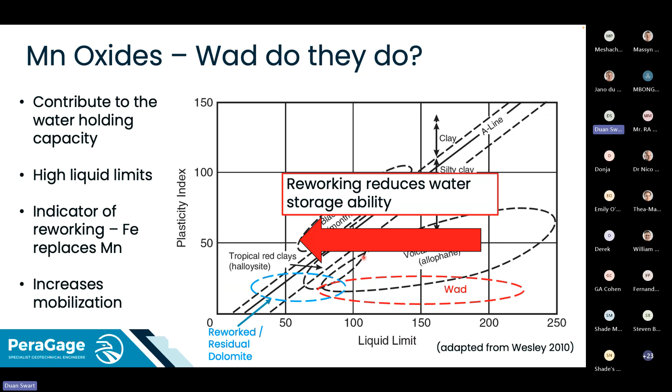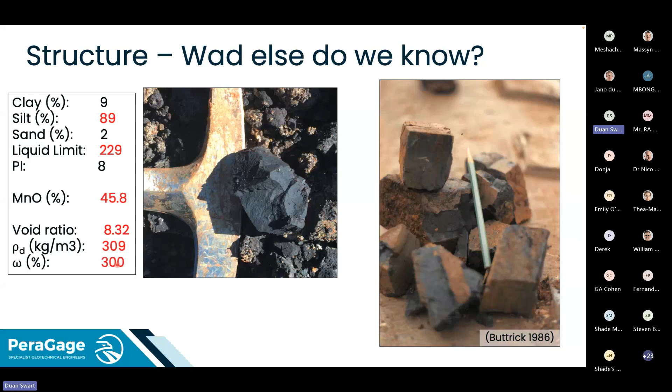That's a mixture. That's due to the structure, the macrostructure that's present, because it's an extremely low density material from the weathering process, and also the birnessite mineral in it. And density was quite low, and at saturation had a moisture content of 300%. We did soil water retention curves on it at Tuks.

The curve on the left is for the structured WAD. The measured are the X's, which, because that tensiometer is so good, kind of measured so well it's basically a line - the X's have joined to make a line. And then we used the Fredlund and Xing equation to extrapolate that curve.

And then we took that material in that test ring, and we remolded it, trying to get it back to the same density, but getting it to 300 kilograms per meter cubed is a bit tough. But we also tested it and got the curve and extrapolated with the equations.

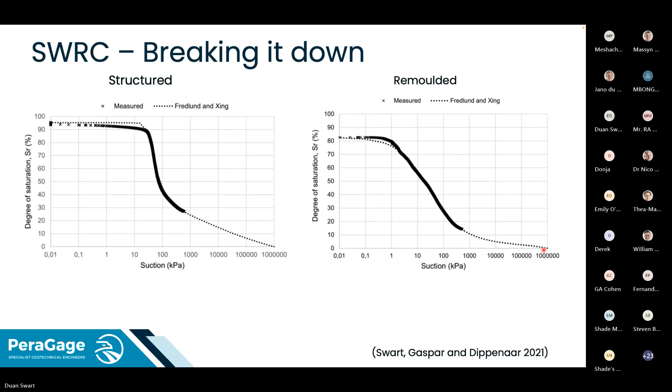I know the curve would change with the change in density, but when the material is remolded or reworked in nature, it would densify - it wouldn't become lighter than what it is in situ. So I guess it's somewhat true.

So with the breaking down of the relic structure, you had different moisture content at saturation - the remold was at 87, whereas the structured was at 300. Void ratio has also changed; the remold still had a very high void ratio of 2. And the changes in the curves will be due to the changes in pore sizes, shape, and distribution.

And then I just want to highlight the point I was talking about with the sinkholes - if you had a material at a certain suction, let's say 100, and you've wet it or dried it, there isn't much change in the suction over a wide range of moisture content. Whereas for the remolded material without its structure in place, the same change will result in a much bigger suction change behavior.

So that just tells me that influencing or impacting the structure of WAD, which usually sits at the throat of where a sinkhole forms, could be a very important thing that we need to consider when modeling this in future.

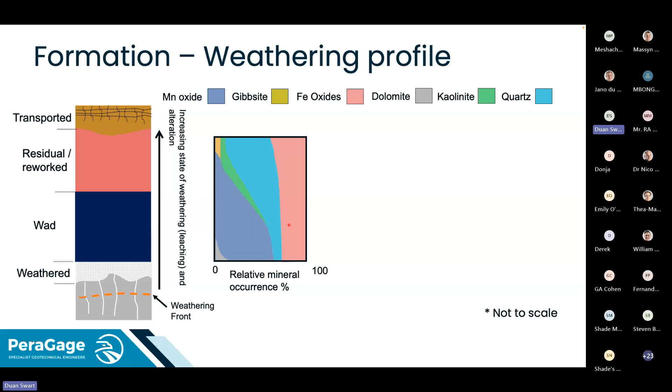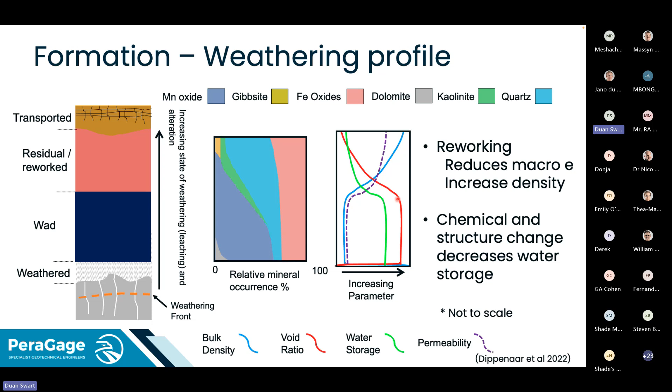This is now testing that I didn't show today, but it's there. And then the structure profiles also - bulk density starts high, in a very short time becomes extremely low for the WAD, and then the WAD either densifies or the manganese and iron gets swapped out, which increases the density. Void ratio is opposite to that. Water storage also decreases with increased reworking, and permeability generally improves with low manganese contents, and the structure breaking down. Yeah, so that's kind of the presentation.

I don't know why I'm concluding here. I guess I just told you guys a story and showed you some photos, but this was all done on completely weathered rock, which would test as extremely weak rock, less than 1 MPa. So a lot of people will treat it as a soil - that's kind of the line for engineers.

But generally the in situ properties are governed by the structure, mainly by the structure, but sometimes you get a unique mineral material like WAD that has a big influence on its chemistry. And then this will depend - this is not for all weathered material. It depends on the rock type.

Water flow regime, where it is on the slope - if it's waterlogged, smectites will form; if it's high up, it will be kind of your kaolinites. So it's dependent on a bunch of stuff.

And then just to highlight that the completely weathered and residual zones are generally metastable. As soon as you expose it to the Earth's surface, it's in a state it's never been before, and it would generally rapidly weather and usually decrease in, or have worse, parameters over time. So it will never get better. It'll always become worse in terms of a geotechnical point of view.